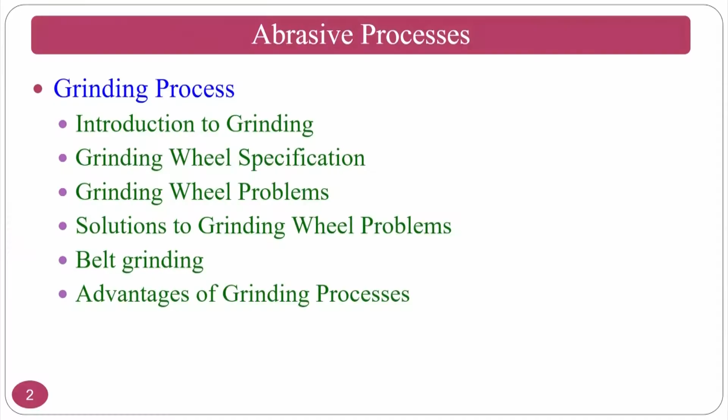We are discussing the abrasive processes. In this topic, we have already seen the grinding process, including introduction to grinding, grinding wheel specification, belt grinding, and the problems and solutions related to grinding wheels. Now we proceed to grinding fluids, which is also part of our syllabus, called machining fluids.

The grinding fluids, basically, if you see in a machining operation or surface grinding, in this region you can see a lot of spark generated because of the friction between the grinding wheel and the workpiece surface. So in order to reduce the temperature generation and the heat effect on the workpiece, people always use grinding fluids.

Grinding fluids can be lubricant based or coolant based. Both are there, depending on the application, whether you are going for high speed, low speed, or medium speed. This will decide which type of cutting fluid you use in the particular grinding operation.

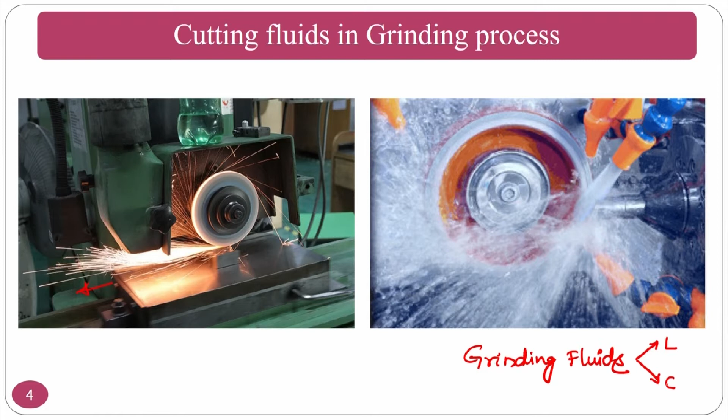As you have already seen the grinding wheel specification, we need to see which parameter has the most influence with respect to grinding fluids. The abrasive type doesn't matter much, whether it is alumina, silicon carbide, or diamond. The grit size also won't have much effect, whether medium or coarse. Grade is the bonding between the abrasive particle and the bonding material, and whether it is hard or soft bonding, it also doesn't have much effect.

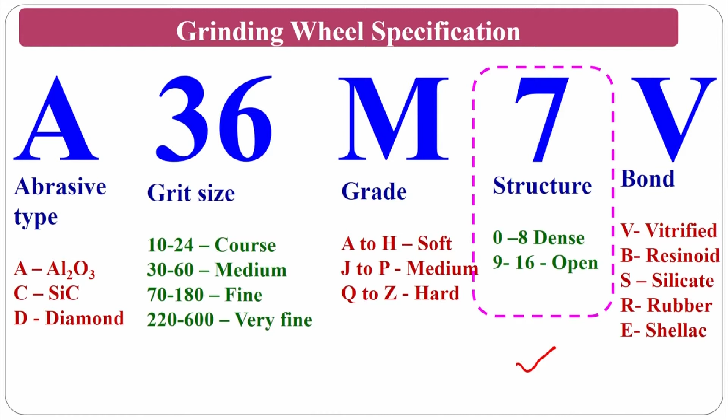The structure, if you see, is nothing but open structure and dense structure. When you apply the cutting fluid or grinding fluid, it tries to enter and helps the grinding wheel avoid loading, and also helps in cooling. That's why the most important factor when considering grinding fluids is the structure, which has more influence compared to others. The different bondings, vitrified, shellac, rubber, and so on, don't have much effect. Only the structure specification has significant influence when applying the grinding fluid.

The significance of grinding fluid relates to the presence of a boundary layer of air around the periphery. If you don't use cutting fluid, air will normally be present between the workpiece and the grinding wheel, and it can penetrate into this region. If you apply cutting fluid, it plays a major role in preventing burning of the workpiece. It reduces the burning effect and chip burnishing, while also cooling down the machining region and lubricating it, so the temperature generation is much less.

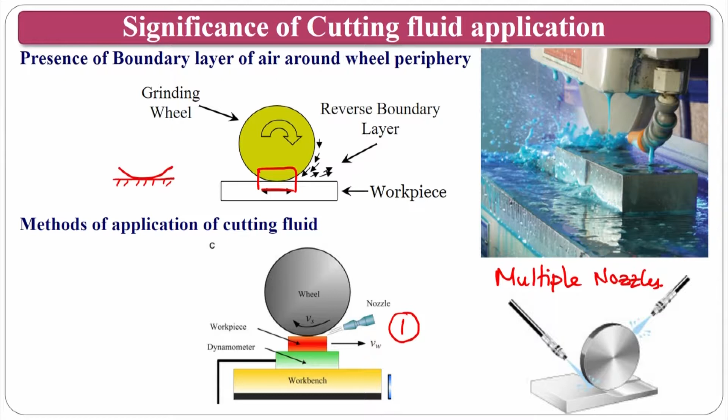Regarding applications of cutting fluid in grinding, it is generally accepted that heat generation is a limiting factor in the grinding process due to thermal damaging. If there is heat generation in the grinding process, there will be thermal damage with respect to the workpiece.

It comes back to energy transfer because thermal energy transfer takes place. Whenever you use the cutting fluid, what happens? The thermal energy gets extracted from the machining region.

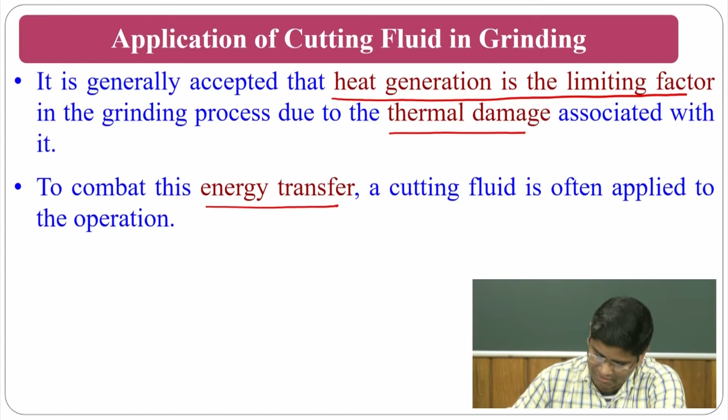These cutting fluids also limit the amount of energy transferred to the workpiece through debris flushing, lubrication, and cooling effect. What happens? It reduces the temperature generated in the machining region through debris flushing.

That means you are flushing the debris between your grinding wheel and the workpiece, and the cutting fluid also helps dislodge the clogged material.

It helps in terms of lubrication, because with proper lubrication, what happens? The friction between the grinding wheel and the workpiece reduces, so heat generation is less.

The cooling effect: the workpiece has to be cooled so that it doesn't go into the thermal softening region and related issues.

There have been many new and exciting cooling systems and applications. There are many varieties of techniques, like flood cooling, multi-nozzle as you saw in the previous slide, and single nozzle.

Nozzle positions can also be varied, whether at 0 degrees, 15, 20, or 30 degrees, and at the same time the standoff distance between the wheel and the nozzle matters. Solid lubricants are also used, and minimum quantity lubricant, called sustainable grinding, can also be used in cutting fluid applications.

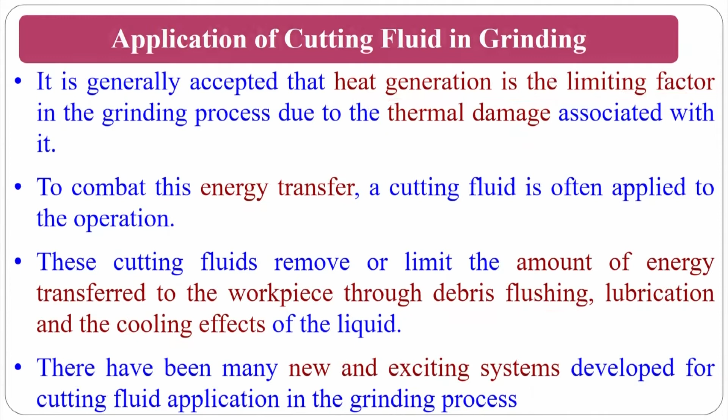Cooling mechanisms in grinding: if you look at the need for cutting fluid, the cooling mechanisms, and the type of fluid, you can divide this into three segments - the cutting fluid application, where common nozzle design is one type.

At the same time, there are uncommon nozzles, basically used when going for solid lubricants or floating nozzles - there are some varieties of these uncommon nozzles as well. So you have to choose according to your requirement. What is your requirement?

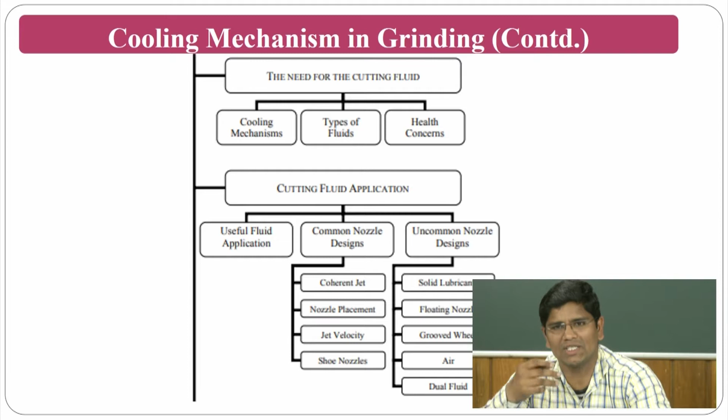Whether you want to remove material in bulk amount, or for surface finish, whether you have to do form grinding, normal grinding, or centerless grinding - depending on the type of grinding you want to use, you choose your nozzle as well as the cutting fluid.

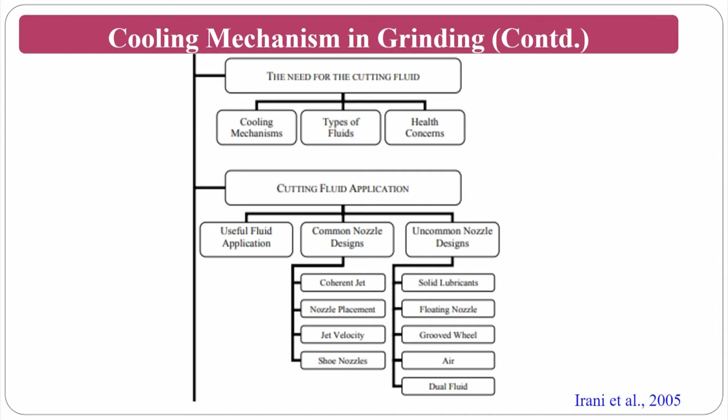Looking at the types of nozzles, the first one is the basic shoe nozzle. This is one of the common and conventional types - these shoe nozzles are very effective because they maximize the amount of cutting fluid passing through the cutting zone.

This is the cutting zone - the workpiece interface and the grinding wheel interface - so the grinding fluid can pass through and maximize coverage on the periphery of the machining region.

The other variety is the floating type nozzle. Here, tension springs allow the nozzle to float as per requirements, so that you can send the cutting fluid into the machining region.

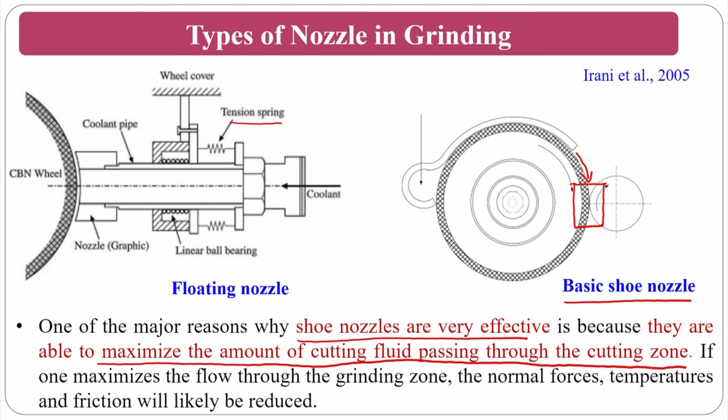Regarding nozzle positions in grinding, researchers have worked on this. You can use a tangential position, or an intermediate position, because you need a certain boundary.

Basically, if you position the nozzle here, the cutting fluid flows like this and occupies the machining region. If you use it here, it comes through the boundary and flows like this. If you use it here, it flows like this instead.

The nozzle standoff distance - how far you are keeping the nozzle - is one factor. At the same time, how inclined you keep the nozzle so that the cutting fluid follows the periphery of the grinding wheel has also been studied by many researchers.

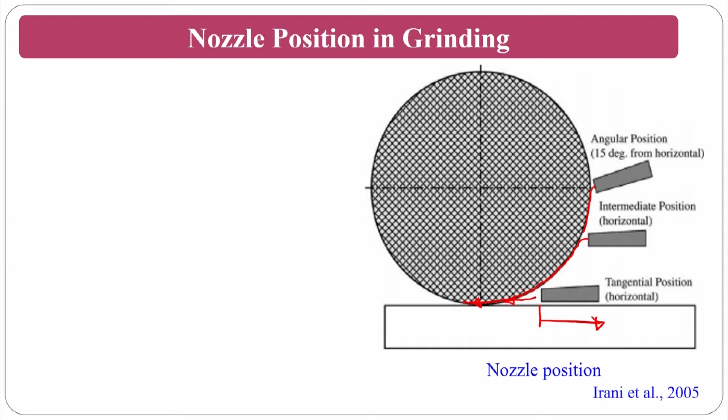The cutting fluid contributed significantly to improving the surface finish of the samples, because the conventional grinding process is considered one of the finishing processes - that's why people use it for finishing.

So as an operator, the output I look for is a good surface finish on my product. That's why you normally adjust and play with the nozzle.

It also appeared that decreased nozzle distance from the wheel - that is, the standoff distance, how far your nozzle is standing away from the wheel - has an effect.

At the same time, flexible hose helps in positioning of the nozzle. So how flexible your hose is - as we have seen in the previous slide, that floating type - these can also improve the surface finish.

People have studied this, so those who want to study can go through the literature, look at what types of cutting fluids they have used, what workpiece materials, whether there are drawbacks, or if you can understand some good mechanics, temperature measurements, or experiments.

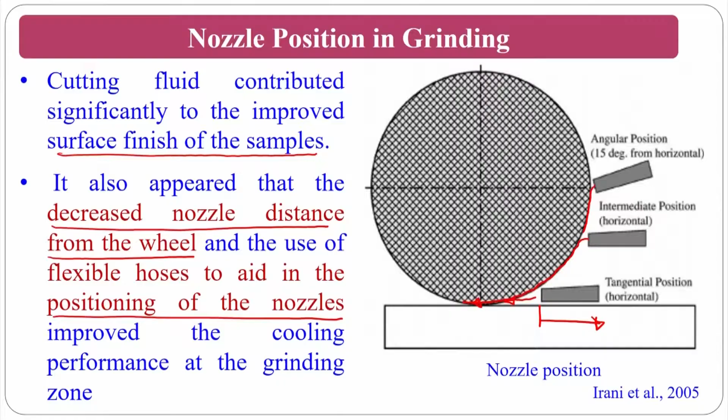There is another nozzle type called a dual nozzle, which we have seen the schematic of in the previous slides. Here also you can use the coolant - there is oil coming from here, and at the same time water also coming from here. Dual nozzles are there; the oil helps in lubrication, while the water helps in cooling.

So the coolant water was applied to the underside of the workpiece via the positional nozzle so that it can cool. The second is with the conventional cutting fluid - normally RZ, if you talk about it, whenever I was talking about surface roughness in the machining process.

RZ is nothing but the maximum peak to minimum valley. If a surface roughness looks like this, this is nothing but your RZ - maximum peak to minimum valley. So this will normally be the maximum.

That's why this is 3 mm in a normal single nozzle. Whenever the authors used a dual nozzle, it reduced to 1 mm. That means the surface roughness decreased, meaning surface finish improved - that means better surface is achieved.

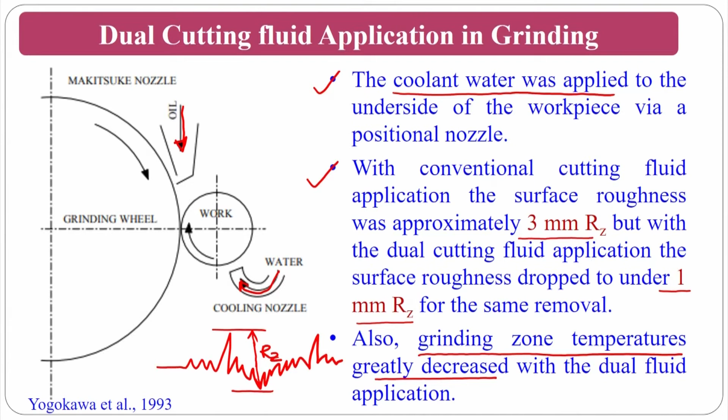Another benefit is that grinding zone temperatures are greatly decreased. Whenever grinding zone temperatures decrease, the thermal damaging on the workpiece will decrease. So it not only gives better surface finish, it also decreases the temperature, reducing thermal damage. So these are the two benefits the authors got by using the dual cutting fluid application technique.

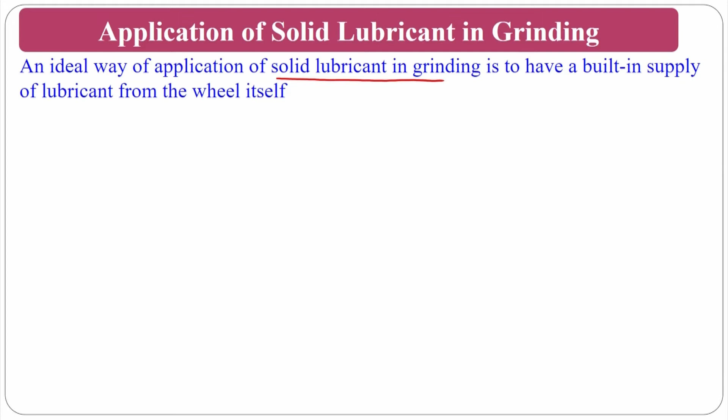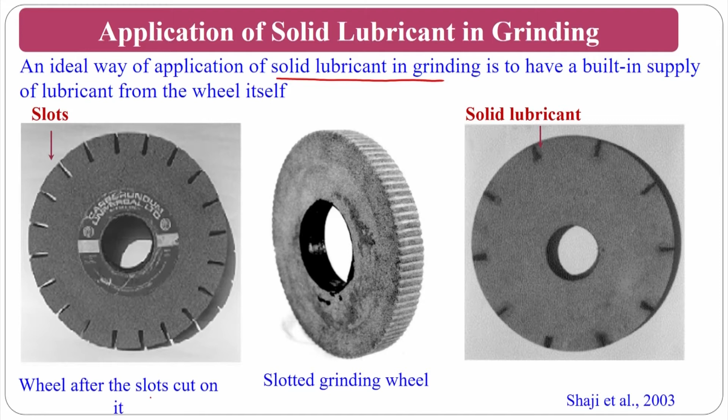There are also authors who have used solid lubricants. An ideal way of applying the solid lubricant in grinding is putting this material or built-in supply lubricant - solid lubricant can be done. There are varieties, like wheels after slots are cut on it, so you can put solid lubricants by cutting slots.

Another one is a slotted grinding wheel, where you put slots and also fill these slots with solid lubricants. At the same time, you can also put solid lubricant sandwiched in the wheels - basically you sandwich it in and use the solid lubricants.

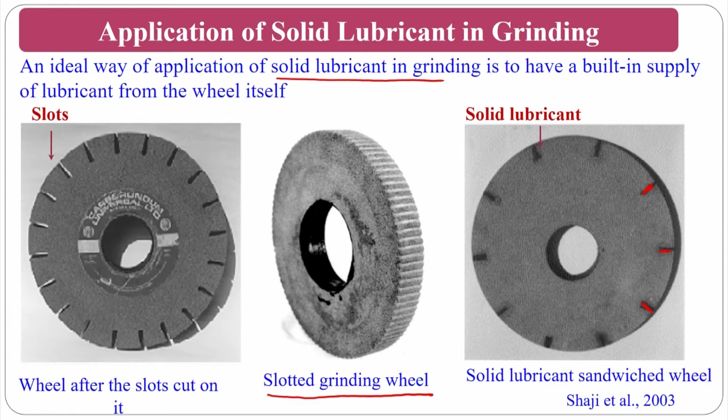Not only this, people have also used flood cooling. They have taken air, like the minimum quantity cutting fluid we saw previously, and sent solid particles along with the air, so that a jet of solid particles goes into the grinding operation.

People worked on solid lubricants also, but those interested can explore more in this area. For references, you can see some papers on solid lubricants for metal cutting applications as well as grinding applications by Professor P.V. Rao of IIT Delhi - his group works extensively on solid lubricants and related topics.

If you are interested in exploring all these things, you can refer to Professor Rao's papers, which also explain a lot of the mechanics, usefulness, and related aspects. Those who would like to do research on solid lubricants in metal cutting and grinding operations can go through those papers.

Now regarding sustainability - as I mentioned many times, the course title says machining and machining fluids. So at last what I want to say is that whether I teach about machining or about machining fluids, my ultimate ambition is towards sustainability - how sustainability can be incorporated so that a better output comes. At the same time, I can also help safeguard the operator and make him healthier with respect to emissions and related issues.

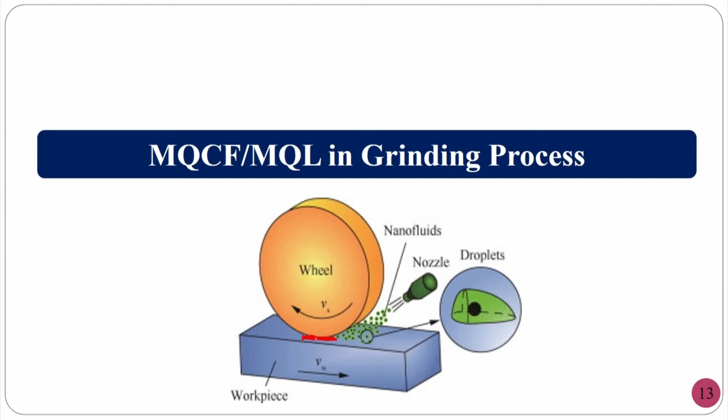That is the intention of MQL, minimum quantity lubrication. To avoid the adverse effects of cutting fluid, the minimum quantity lubrication or minimum quantity cutting fluid technique came into existence.

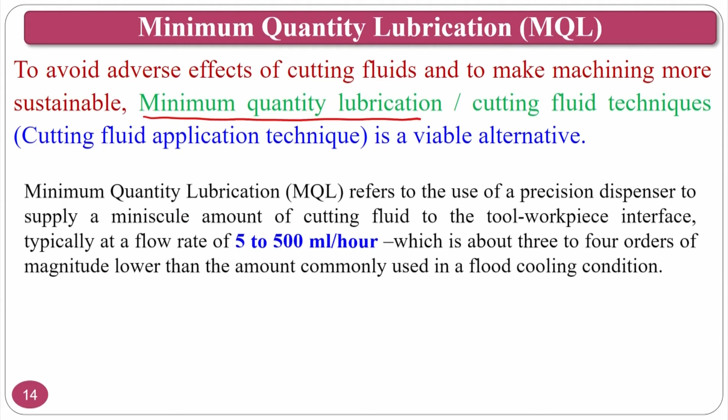Minimum quantity lubrication refers to the use of very minimal cutting fluid, that is 5 ml per hour to 500 ml per hour. Normally people talk about 50 ml per hour. That is very less quantity compared to flood cooling, where you spend half a liter per minute. Here, per hour, you are spending half a liter maximum. So this is about the minimum quantity.

Over 2 billion gallons of cutting fluid is wasted every year. So in order to keep the resources for the next generations, we have to minimize cutting fluid utilization also.

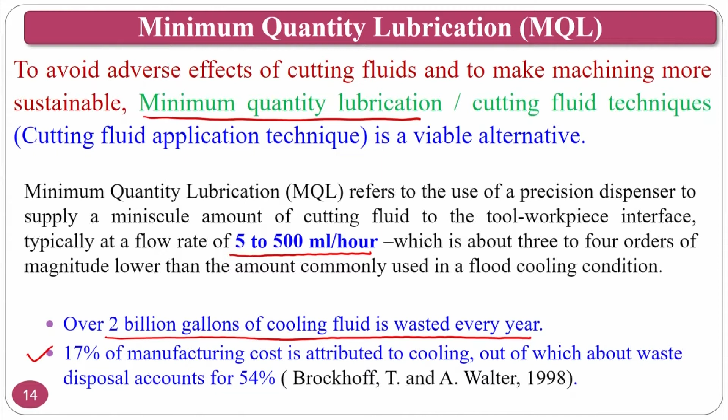At the same time, 17% of manufacturing cost goes to the cutting fluid basically. So if I can minimize the cutting fluid, I can be competitive in the market by selling my product at a minimal price.

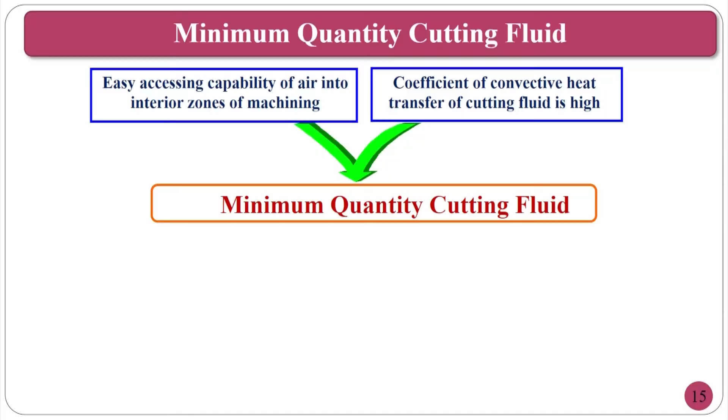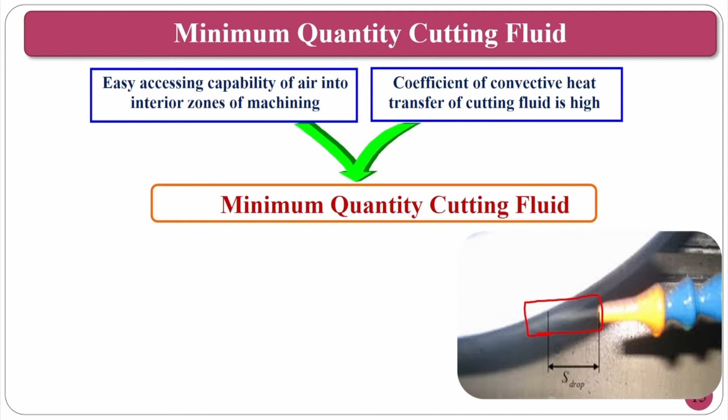This mist helps not only in providing lubrication and cooling through forced convection, but because of the high velocity of this jet, the clogging also can be removed, meaning wheel loading will be minimized.

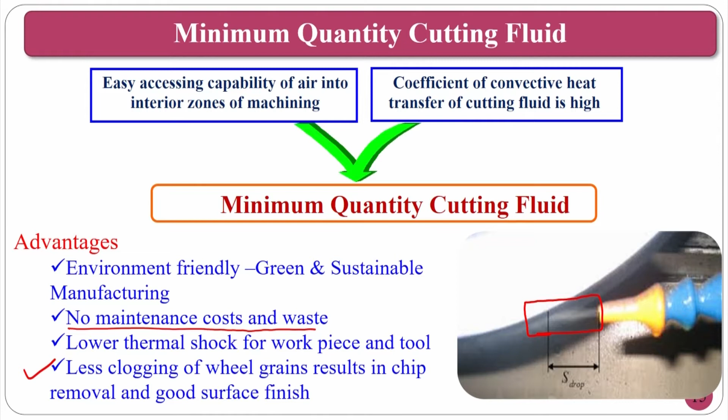The advantages are environmental friendliness, no maintenance cost or waste, lower thermal shocks, and less clogging of the wheel. If there is any clogging, the jet can penetrate and remove it. In this way, you can enhance the grinding efficiency of the process compared to the normal process.

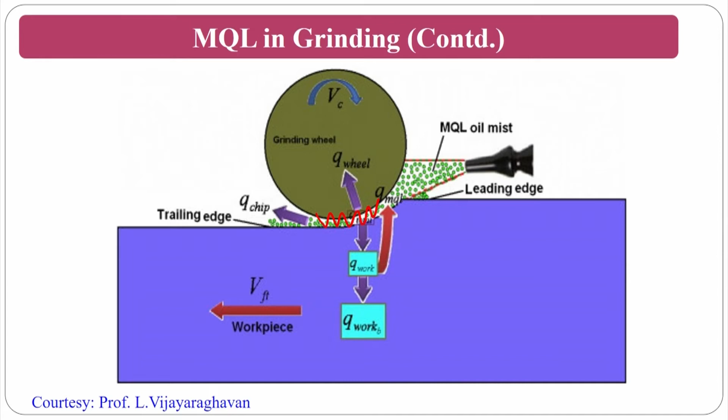This is how you can see the grinding wheel with minimum quantity lubrication. The fluid occupies here, and the abrasive particles will remove the workpiece material. These slides are taken from one of the senior professors from IIT Madras, so thanks to the professor.

Researchers also studied the droplet size and experimentally validated it. The question is, when I send the cutting fluid and compressed air and mix it internally, what happens? I am sending an atomized gas which has high convective heat transfer. Now the problem is how to calculate the droplet size, which is the biggest question. For that purpose, a Malvern analyzer is used.

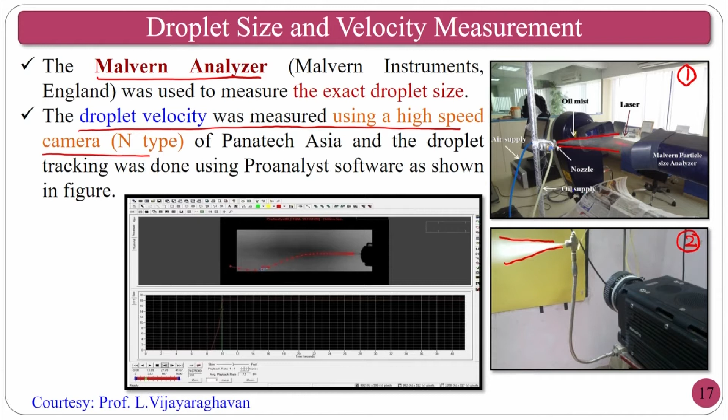At the same time, you can also measure the droplet size by Malvern analyzer. Once you know the physics, people with knowledge about fluid and thermal areas, not only manufacturing, can simulate the droplet sizes. They can check the droplet sizes as well as simulate using standard softwares, and validate it.

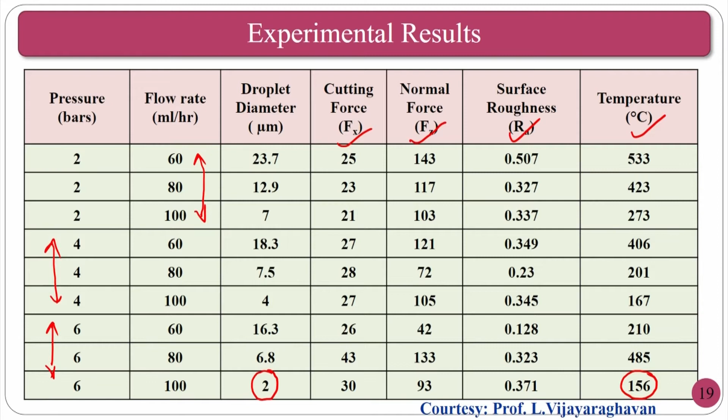Wetting area calculation is another important area - whenever droplets are falling in the measuring region, whether it is occupying the complete area or not occupying the complete area, that is one of the concerns. For that purpose, you have to play with your particular cutting fluid.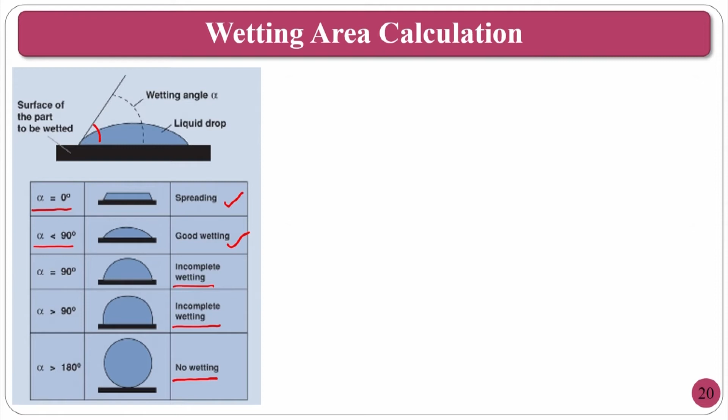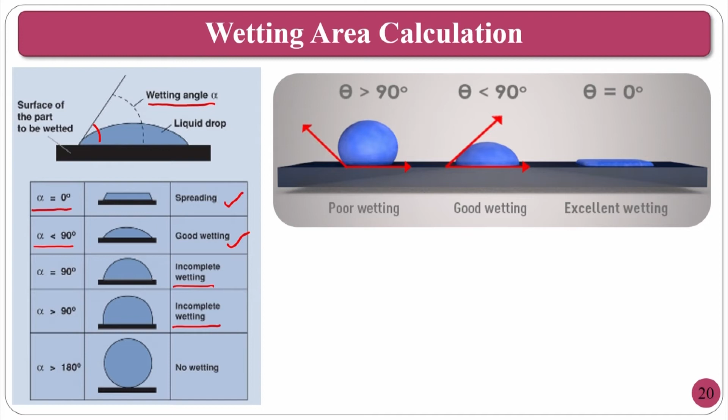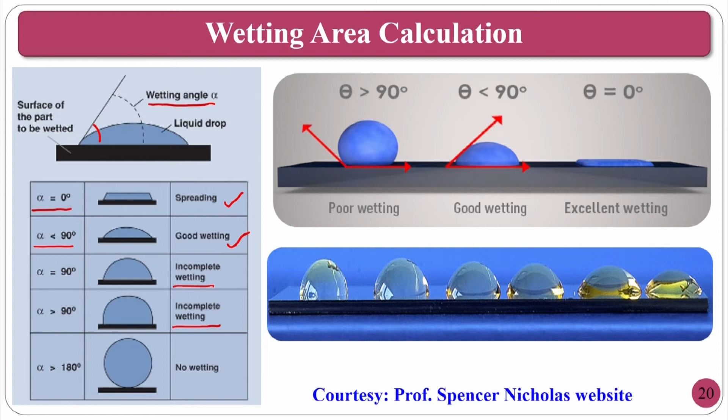Some of the surfaces are shown here - this picture, the last picture, is taken from Professor Spencer's website. This is not exactly for contact angle measurement; there are gradient surfaces, but my intention in this slide is to show you how a droplet, if I put an individual droplet on the surfaces, the contact angle changes. That is why I have shown here - you can see practically how the contact angle looks, how a liquid, if you are putting it on a surface, looks with respect to the contact angle.

So if my cutting fluid has good spreading ability, what will happen? It will occupy most of the area of the machining region, and it can extract more amount of heat. We will see here - the contact angle, if you see alpha, what happens is if it occupies this much area, it can extract more area. Assume it occupies this much only, then it must extract only this particular area. That's why, as much spreading as possible, you have to spread it on the surface. If there is better spreading, then there will be better wetting.

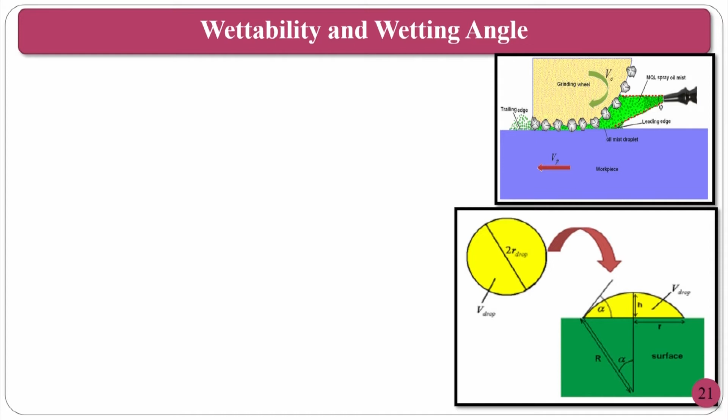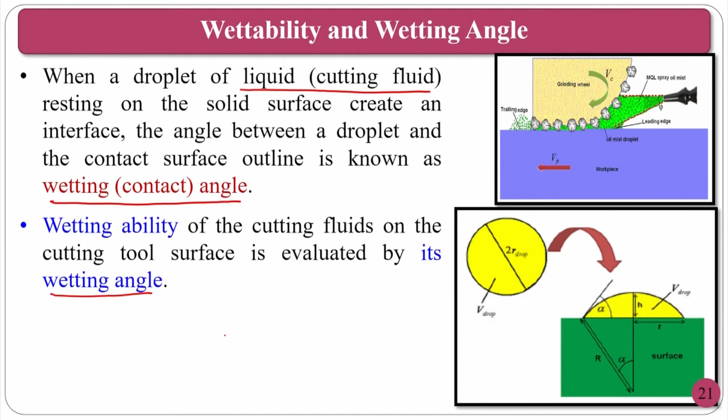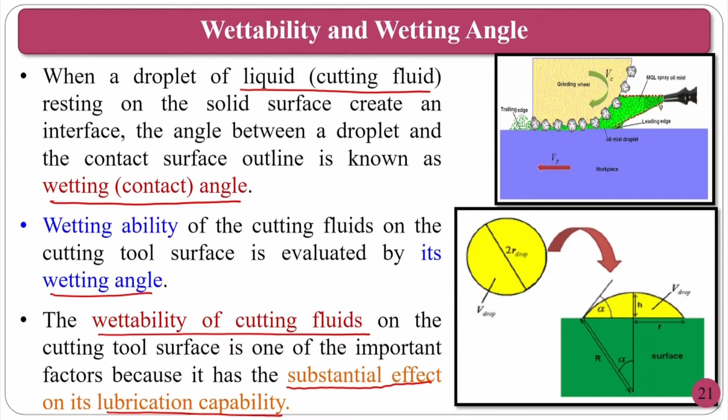When a droplet of liquid, which is nothing but the cutting fluid, rests on a solid surface, it creates an interface angle between the droplet, which is nothing but the wetting or contact angle. Wettability of the cutting fluid on the cutting tool surface is one of the important factors, because it has a substantial effect on the lubricating property as well as cooling property. If it has better wetting ability on the surface, it can have better lubricating property, because you will have boundary lubrication, hydrodynamic lubrication, or mixed lubrication, depending on the type of lubricant you are sending, and at the same time how much pressure you are sending.

So in this way, if you can cover more area, what will happen? You can lubricate more area and you can extract the heat from more area. At the same time, droplet diameter also you can see here.

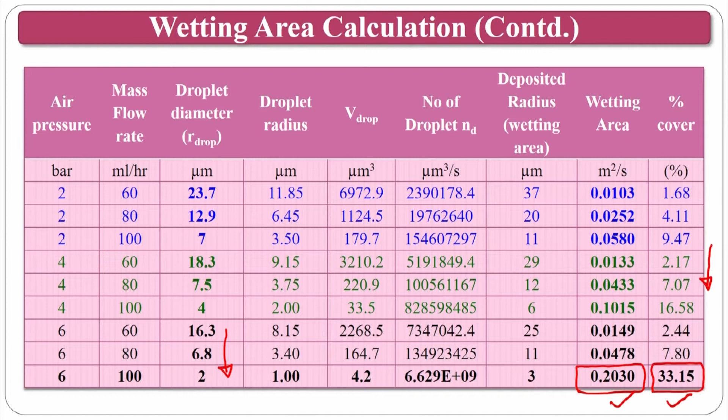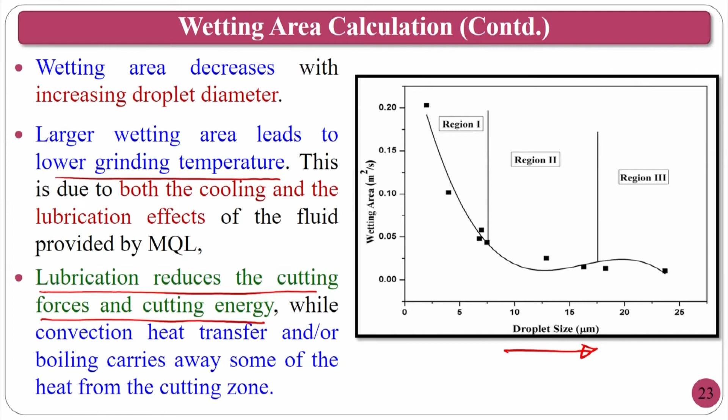As the region moves on, what will happen? The wetting area is decreasing as you increase the droplet size.

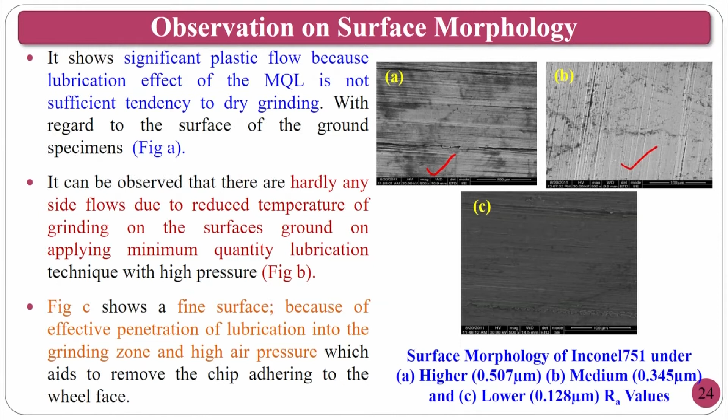The observations on the surface morphology basically boil down to what surface roughness you get. If your particle size decreases, there is no side flow. In the first case, surface roughness is very high, and side flow is there. In the second case, the side flow is not there, but surface roughness is still very high. In the last case, if particle size is very less, you get a better surface and surface morphology, and there is no heating, no side flow, and none of those issues. For that purpose, it is better to go for as minimum as possible droplet size.

Next we move on to conventional abrasive processes. There are other conventional abrasive processes besides grinding and grinding fluids, which we have already seen. Now we move on to the honing process, followed by lapping, super finishing, drag finishing, vibratory finishing, sand blasting, and if time permits, we also see some introduction to advanced abrasive finishing processes.

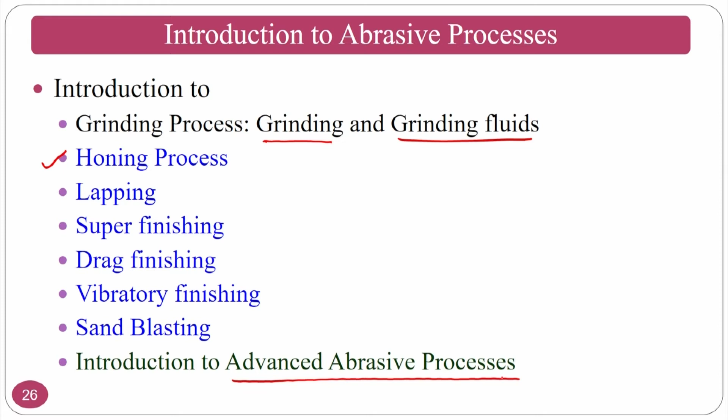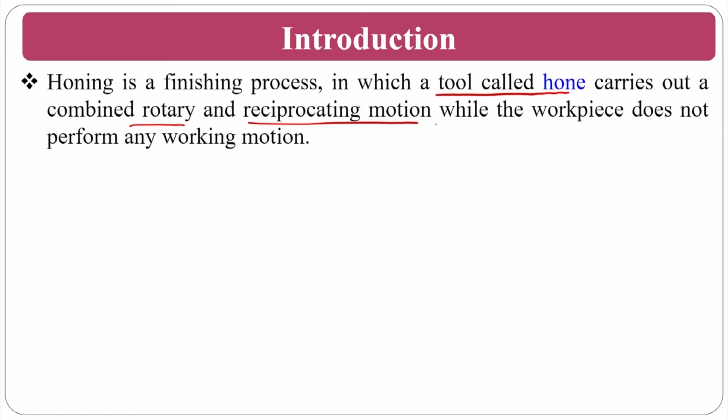Moving on to the honing process. Honing is one of the conventional finishing processes, used extensively to finish cylinder liners and cylinders. Honing is a finishing process in which the tool is called a hone. The tool, which you will see in upcoming slides, will have both rotary and reciprocating motions. The workpiece does not perform any type of motion; it remains stationary, while the tool not only reciprocates but also rotates, going in and coming out while rotating.

That's the helical path it will follow.

Most honing is done on internal cylindrical surfaces such as automobile cylinder walls. The main application of this process is in automobiles, for cylinder and cylindrical liner applications, and I will explain why you have to use this.

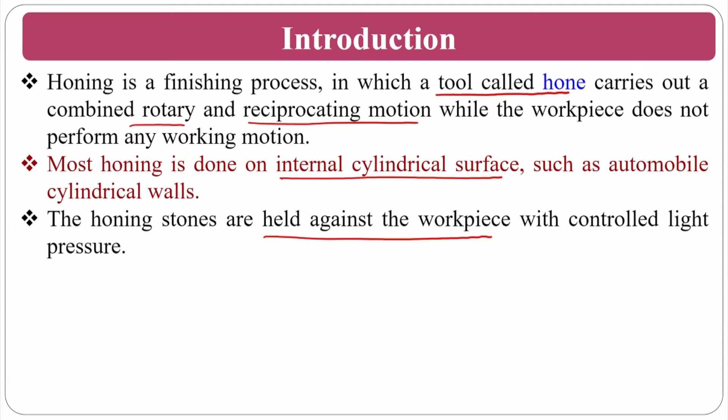The honing stones are held against the workpiece with controlled light pressure, because they are loaded by springs, and you can vary this pressure to perform the finishing operation. The hone is not guided externally, but instead floats and is guided inside the workpiece itself. The honing stones should not leave the work surface, and the stroke length must cover the entire work length. If your cylinder liner is this big, the stone has to travel throughout its length and back so it can finish the complete workpiece.

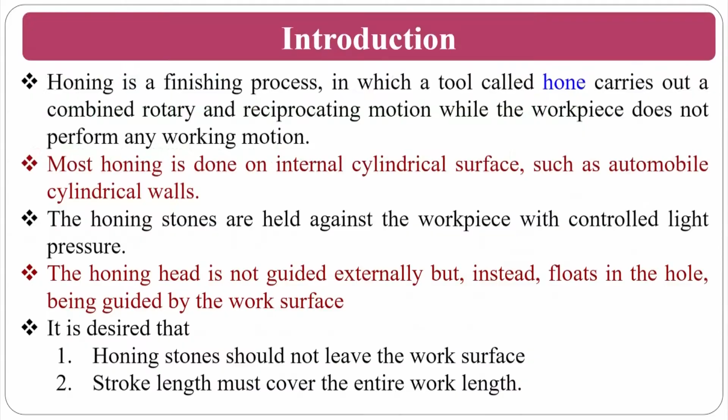This is called the hone. Basically, the honing process is an abrasive process where a small amount of material is removed. That means the specific energy requirement is very high, like in the grinding process. Mainly internal holes are finished this way.

The honing is done by honing stones. The honing head with honing stones is called the hone, and what you are seeing here is the honing tool. Honing stones are made of abrasive materials, mounted on adjustable pushing springs. This hone has honing sticks loaded by spring loads, and you can vary the spring loads on these.

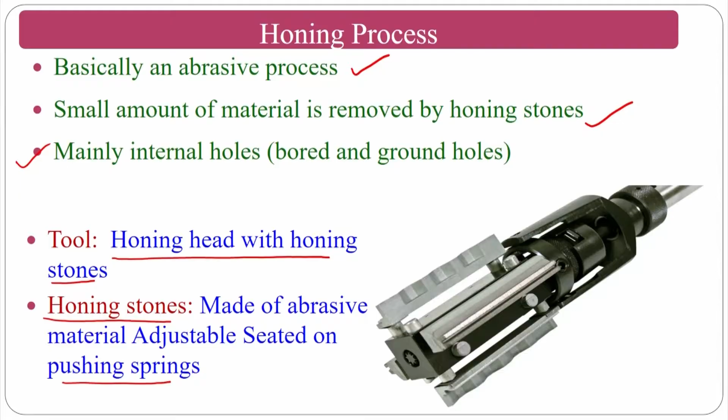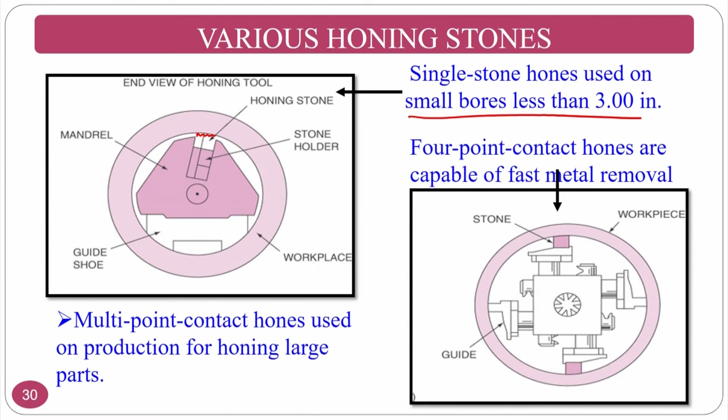A honing stone is called a single stone with a small bore. Normally you will have only a single stone that finishes the surface, because it rotates, goes inside, and reciprocates. There are also multiple-stone types, as seen in this slide where there were four stones, called the multiple type. If you want to remove more material, you go for multiple stones. The honing head has both rotary motion and reciprocating motion.

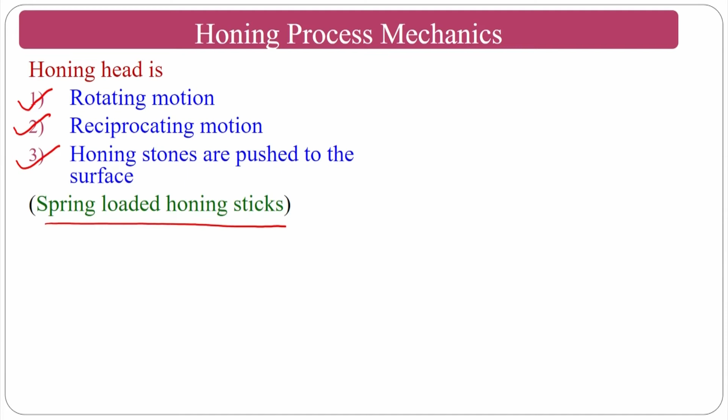Honing stones are pushed against the surface by spring-loaded honing sticks, so you can apply whatever pressure is required. These are adjustable - if you want more material removed, you adjust accordingly, and if you want less, you adjust differently. Because of the combined reciprocating motion and rotary motion, you form the crosshatch pattern. You can see the crosshatch patterns are clearly visible here. This is the honing process.

Why do you require the crosshatch pattern? In engine cylinders, if you had gone to petrol stations in olden days, they used to fill petrol as well as engine oil, that is lubricating oil. The piston motion takes place inside the cylinder, and this lubricating oil comes between the piston and the cylinder walls, enabling smooth functioning. This means the reciprocating motion of the piston will be smooth. For that application, you create the crosshatch pattern.

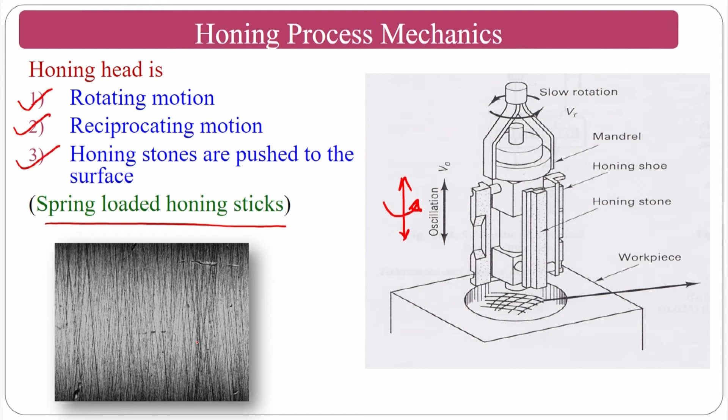Honing is not only a finishing process - it also generates the crosshatch pattern, and lubricant sits in between this surface lay. Lay is the predominant surface direction. These crosshatch micro grooves, or nano grooves, exist along with the surface finish. The lubricant sits there and helps the piston function smoothly. That's why this honing process is used in cylinder liner finishing.

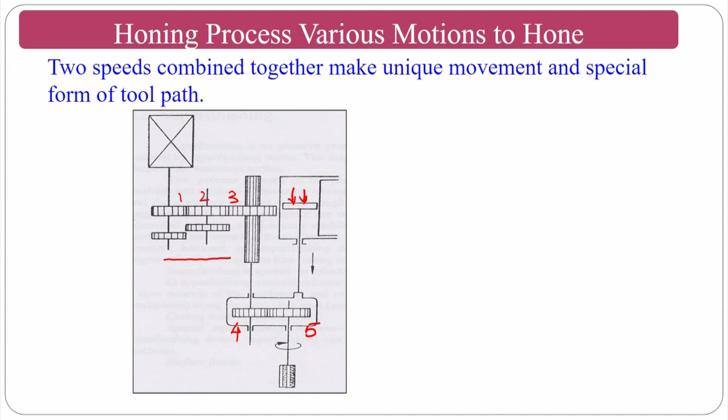How do you impart both rotary motion and reciprocating motion? Rotary motion is transferred through gears - gear 1 to gear 2 to gear 3, then to gear 4 and gear 5. At the same time, reciprocating motion is obtained from this mechanism. So indirectly you get both rotary motion and reciprocating motion, and when you synchronize both, you get a helical path.

Ft is the tangential force and Fr is the radial force, and if you combine them, normally Fc is the cutting force. Electric motors are normally used for the rotary motion, and hydraulic systems are used for the reciprocating motion, so that you can get the helical path, and at the same time it will come in a reverse direction also.

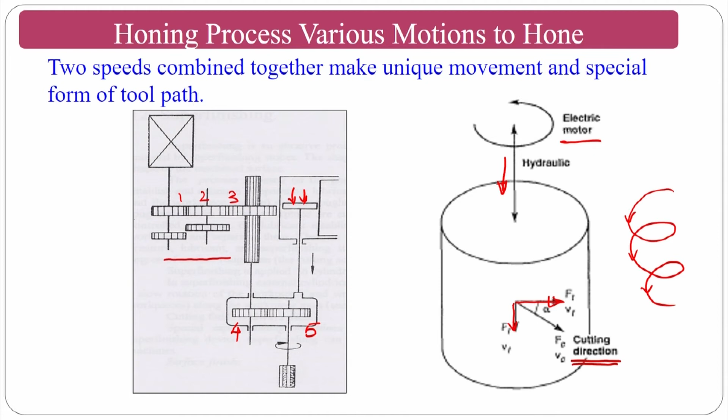Surface roughness, as I said, the crosshatch pattern will be generated on the engine cylinders or the cylinder liners. This is the lay, the predominant direction of the surface roughness or surface finish. You can see this is the reverse direction and this is the going direction, so that you get the crosshatch pattern. The lubricant stays in these crosshatch patterns.

This is not only a finishing process, it also generates a certain pattern, and finishing always helps piston motion move freely. At the same time, this crosshatch pattern helps retain the lubricant so that proper motion of the piston takes place.

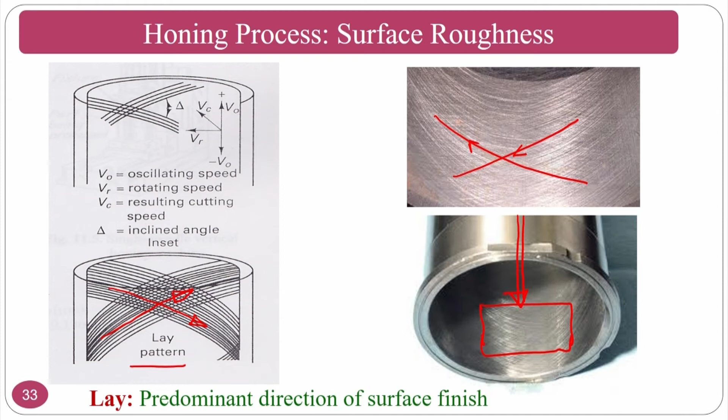If you can see here, this particular area of the cylinder liners, you can clearly see the crosshatch patterns. These crosshatch patterns help the engine cylinder liners.

Applications, as you can see, this is the honing process. It rotates as well as reciprocates in an engine, so you can do the honing process.

As I was telling, previously people used to hone the engine cylinders directly, but it is a costly process because due to piston motion the engines wear out and you have to change them. For that purpose, people found another solution called cylinder liners, where they perform the honing process on the cylinder liners instead.

These are the cylinder liners, and they just fit into the cylinders. So if there is wear out of the cylinder liner, you just take it out and replace it with a new cylinder liner. This is the advantage, and it's a cost effective method also.

If you have some time and there are nearby engine cylinder manufacturing companies, please visit to see the honing process. Some colleges or universities may not have the facility of honing, but many institutes will have it. You can visit big institutes nearby, or if there's a small industry manufacturing engine cylinders, you can go visit that company to see practically how the honing process works.

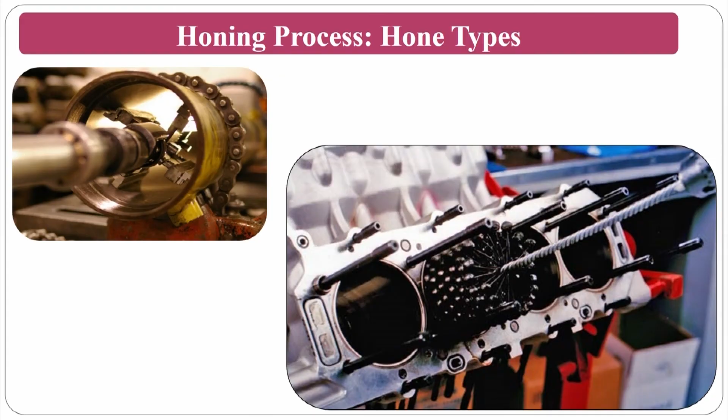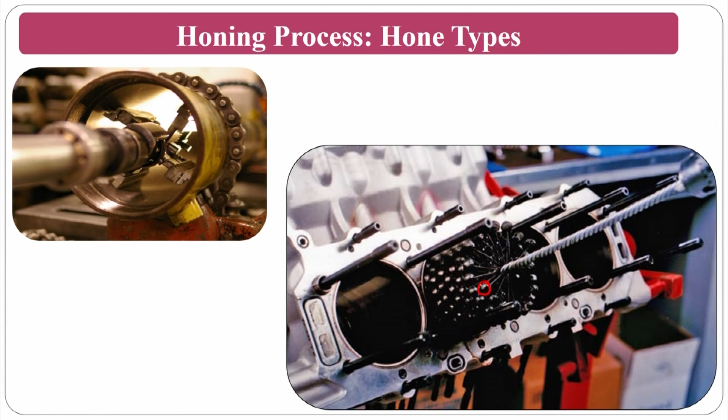There are many varieties of hones. One is the solid type, as you can see in the previous slides. There are flexible types also, where you have spherical balls, and you can reciprocate it through so that you can do the honing process. So there are varieties of hones, these four are there.

As you can see, like a conventional single point cutting tool, grinding is abrasive with millions of multi-point cutting tools. Similarly, the technology is growing in the honing process also. People use these types of things, and also multi-point cutting tools. So you can choose whichever is required, economic, causes less pollution, and is sustainable, according to your requirement.

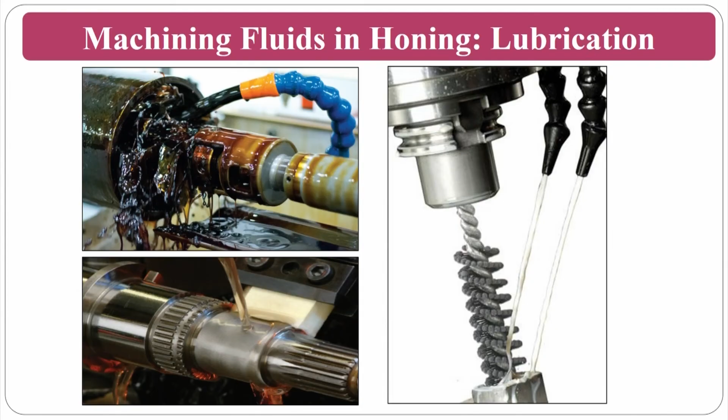The lubrication or cutting fluids used in the honing process - mostly the cutting fluids used here are lubricants. As you can see, these are all mostly lubricant type cutting fluids that will be used.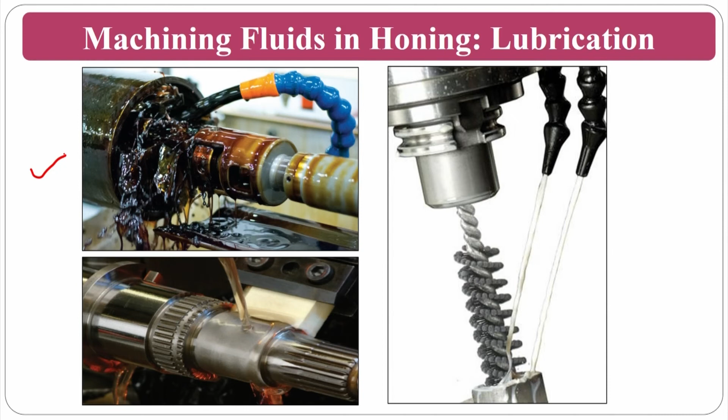Water based cutting fluids are not used. If at all used, very less amount of water based, because cooling is not a criteria here. The lubrication is the major thing that people want here. That's why you always see lubricant based cutting fluids are used.

People who want to work on this, there are very few papers on sustainable cutting fluids for honing applications. So if you have expertise on sustainable green cutting fluid development, you can check those cutting fluids for the honing process also. That can be a good area to take up as your master's or PhD thesis.

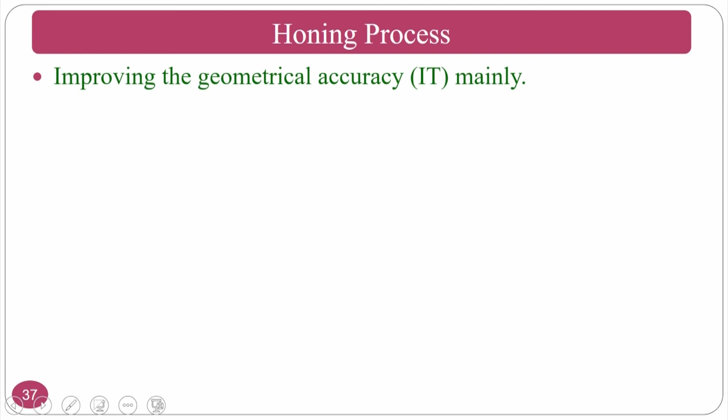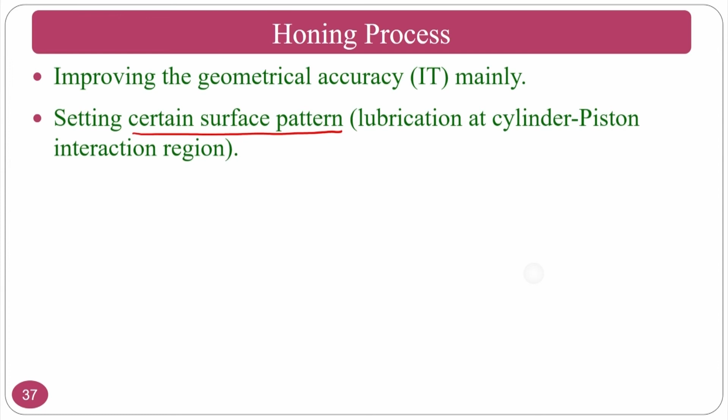This is about the honing process. The advantages of this particular process are that it improves geometrical accuracy and sets a certain surface pattern, meaning it can generate a crosshatch pattern to lubricate. At the same time, this helps in terms of lubrication at the cylinder-piston interaction region.

Same materials as grinding stones can be used, that is nothing but silicon carbide, CBN or polycrystalline diamond. You can use similar types of grinding particles on the hones, which are called honing sticks.

More precise shapes and smaller grains can be used. So the difference here is you can go for precise shapes, and at the same time finer particles, because you need to get fine surfaces, and at the same time fine crosshatch patterns. That's why normally people go for a fine abrasive particle size.

You might have seen the abrasive size in the grinding wheel specification - coarse, medium and fine. People will go for medium to fine rather than coarse. If you go for coarse, the surface roughness will be very high, and the piston cannot move as per requirement, so the piston will fail and the complete automobile will fail. For that purpose, you have to go for finer or smaller grains or abrasive particles.

Cutting fluids are used for lubrication, meaning the lubricating characteristics dominate, not the cooling characteristics. So you have to choose a lubricant, not a coolant.

If you want to go for very high speeds of reciprocation as well as rotation, in those circumstances you can go for a very minimal amount of water addition, if required, but normally it is not recommended. This process is expensive and time consuming, because it takes a lot of time.

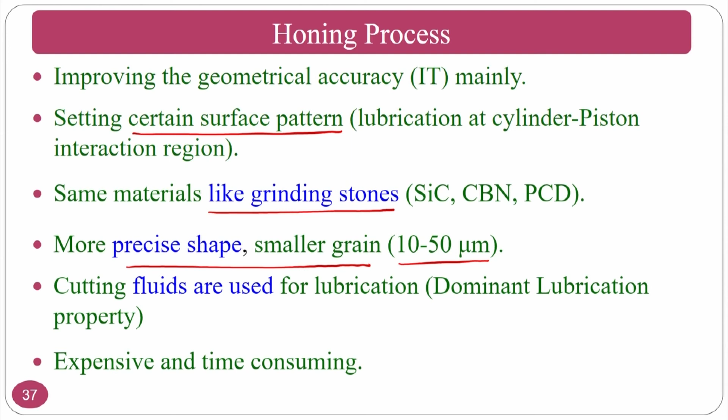This is the disadvantage of this particular process, because the material removal rate is too low, since you have fine particles, and the load spring relaxation will depend on your requirement. If the abrasive particles remove very minute chips, that means the time for finishing will be very high.

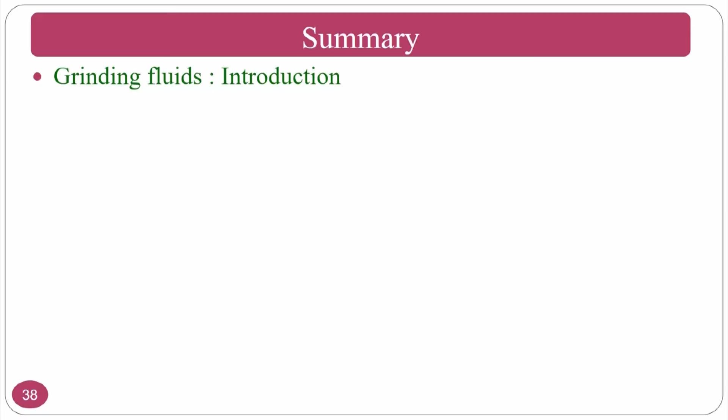Summary of today's class: we have seen the grinding fluids used after the grinding process, and fluid application angles - whether conventional fluid can be used tangentially at 15 degrees or 30 degrees, or what the standoff distance is, how far you have to keep it, and all those things we have seen.

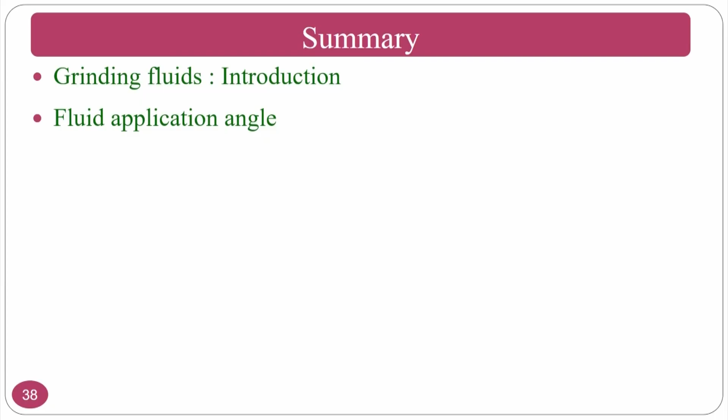The type of cutting fluids - whether people have used liquid type of cutting fluid, solid lubricants also people used. MQCF, that is called sustainable grinding process, is one of the concepts people are working on nowadays.

So people, especially those who want to do research, can go for MQCF in the grinding operation for machining of advanced materials like aerospace alloys or biomaterials or something.

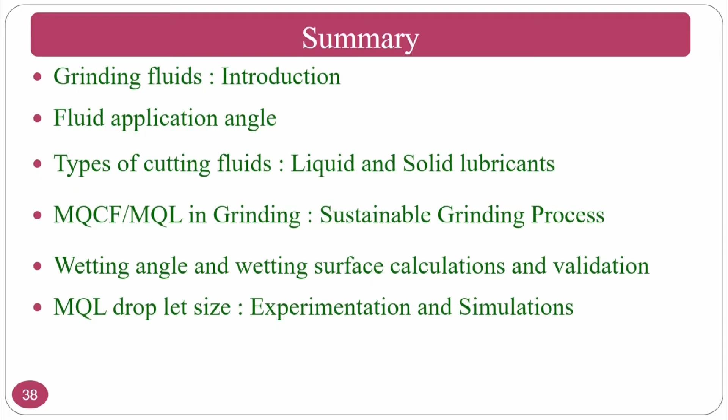Wetting angle and wetting surface calculations, as well as software developed particle sizes - that is droplet size validation - and all those things we have done. That is in MQL, what is the droplet size. Experimentally people have validated it using the Malvern experiment, and at the same time they have also validated it using software by simulating it.

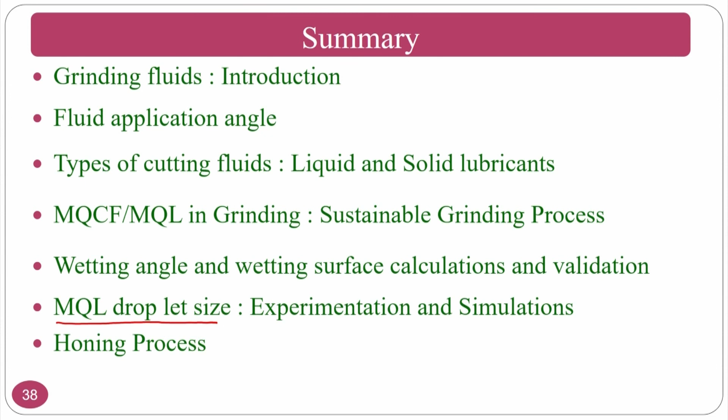And the honing process we have seen, and the lubricants used in the honing process also we have seen. So for honing process, keep in mind that it is lubricant type cutting fluids you have to use, not the cooling type of cutting fluids.